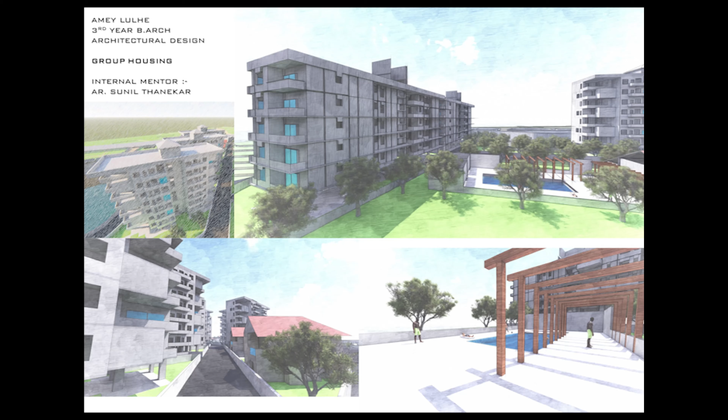Hello everyone, myself Amey Lulhe from 3rd year B.Arch presenting before you my design project of mixed community housing.

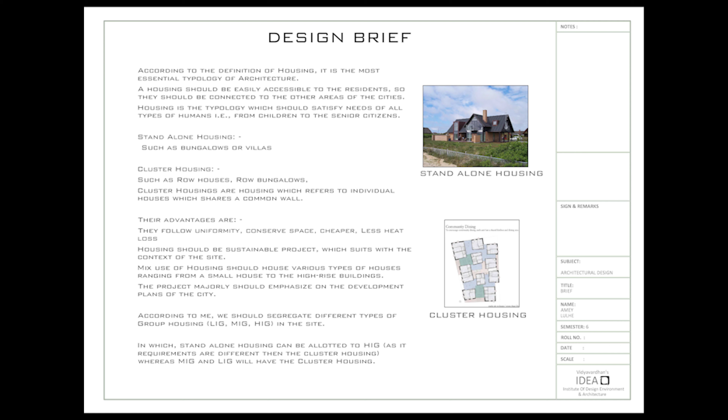According to the brief, we were required to design a housing community with certain sets of requirements. We were required to build housing consisting of mixed types which is both affordable and luxurious. I have designed the community into two parts, that is stand-alone housing and cluster housing, in which stand-alone housing is used for 4 BHK duplex and the cluster housing is used for 2, 3 BHK and 4 BHK buildings.

Case study. The case study I have done for the housing project was the Cadbury village, known as the Bournville village today. It was the decision of Cadbury founder George Cadbury to build houses for the workers of the factory. The decision was taken because the workers had to travel a long distance to the factory. The village was created for the officers and the workers of the factory, which decreased the travel time from factory to the home for the workers.

George Cadbury's thinking was towards the health of the workers. Due to this thinking, the houses were also designed. The houses adapted the Tudor house architectural style. Every house had a green space and natural ventilation, which provided more comfort for the workers who came tired from the factory. Because of the reduced travel time, factorymen got time to spend with their family.

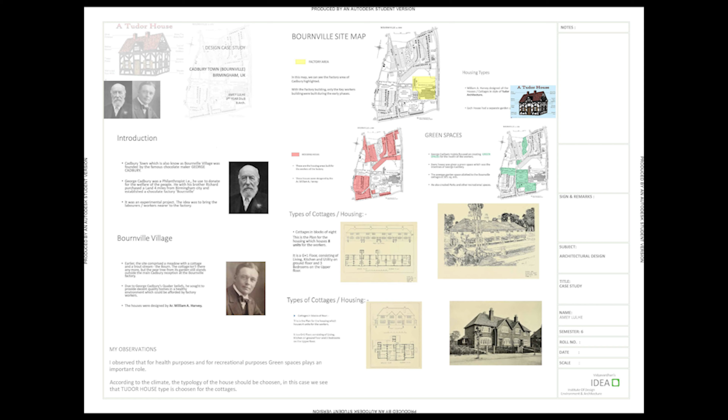Site analysis. The site is situated in Gangapur village, which is situated at the outskirts of Nashik city. The site is adjoining the major road of 30-meter width. This major road connects the city to the village. Besides this, at the west of the site, there is the famous Someshwar temple complex. At the northern side, there is the Godavari river. The site is divided naturally by the water stream into two parts, that is the upper part and the lower part.

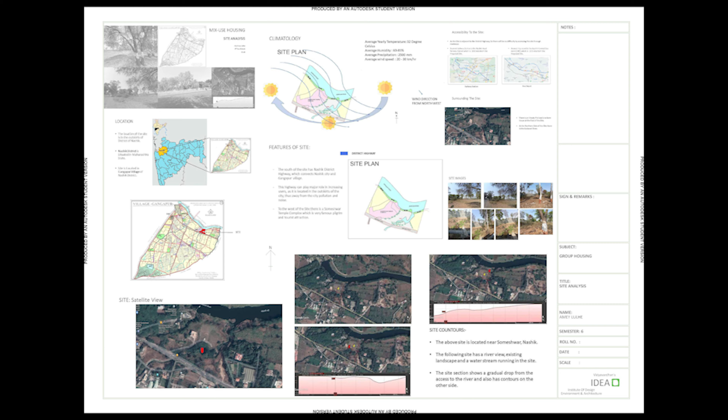The upper part is the bigger, that is the area of the part is 28,760 square meter and the lower part is of the area of 12,590 square meter. Also, at the northern side of the site, there is the reserved site for the Goda Park. As mentioned above, the site has a major road of 30-meter width at the south side of the site. It is the major accessibility point to the site. The major entrances to the site are from this major road.

I have divided the site into three parts, that is semi-public, public and private spaces. The public and semi-public spaces are the commercial complex and the sports area, and the private spaces are the residential areas and the amenity space. The commercial complex is adjacent to the major road of the village. It is accessible to the public and also the residents of the housing community.

There are four access points to the site. Starting from the leftmost, the entry is used for the emergency services. Then comes the main entry, which is situated between the commercial complexes, which have a security cabin. Then comes the pedestrian entry after the commercial complex. The rightmost point, which serves as the exit point, is also the entry point for the 4 BHK users.

There are two commercial complexes, in which the left complex contains 8 medium shops and the right contains 8 big shops. The medium shops have a size of 6 by 10 meter and big shops have a size of 18 by 6 meter. After the commercial part, there comes the residential part, which contains 8 buildings of 2, 3 BHK apartments, 3 bungalows of 4 BHK duplex and 2 buildings of 4 BHK apartments. The 2, 3 BHK buildings are arranged such that they have one major accessible road which is 8 meter wide and it divides into other internal roads of 4 meter wide.

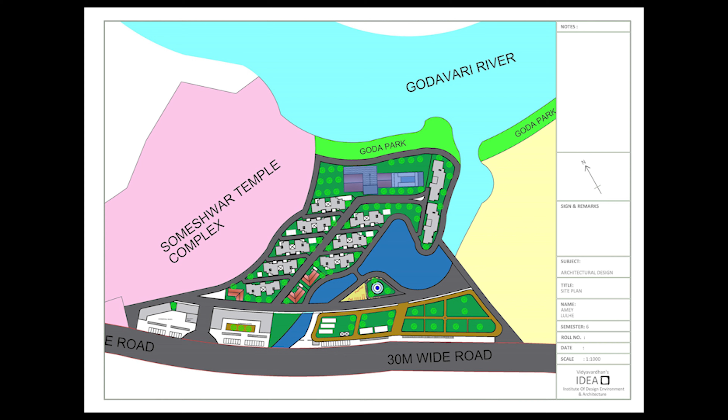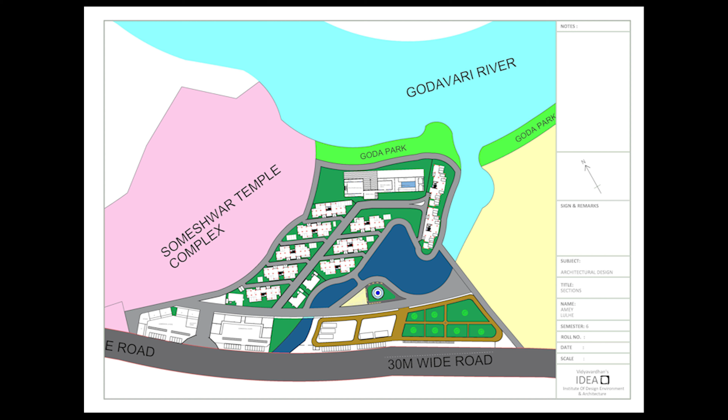Then comes the amenity space. It has the river frontage and contains a multipurpose hall, indoor game space, swimming pool and an admin area. Parking plan. This is the parking plan which shows parking of the 4 and 2 wheelers. The commercial and sports area houses parking of 40 cars and 130 two-wheelers. The residential part contains 196 two-wheelers and 100 four-wheelers.

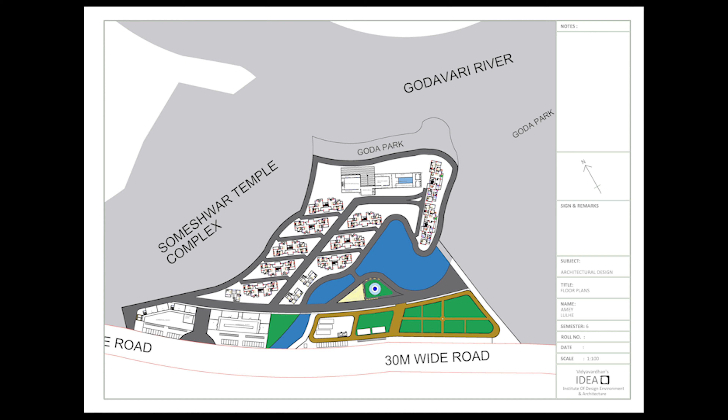There are 8 buildings of 2, 3 BHK units. Each building consists of 14 units. Thus, there are total 112 units, in which there are 56 units of 2 BHK and 3 BHK respectively. These buildings go up to 7 floors high, each floor having a height of 3.15 meter. The 2 BHK unit has a carpet area of 110 square meter and the 3 BHK unit has a carpet area of 120 square meter, each having one master bedroom minimum.

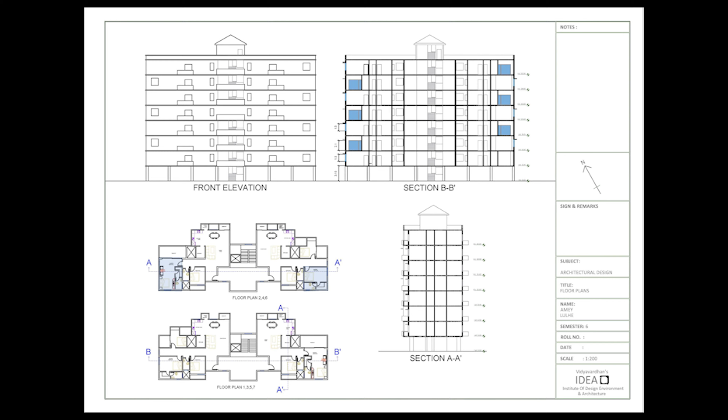Then comes the 4 BHK building, which are 2 in number having 10 units each. Thus, there are total 20 units of 4 BHK. Each floor has a height of 3.1 meter and there are total 5 floors in the building. There are 2 different units on one floor, each having a different carpet area, one having a carpet area of 160 square meter and the other having a carpet area of 180 square meter.

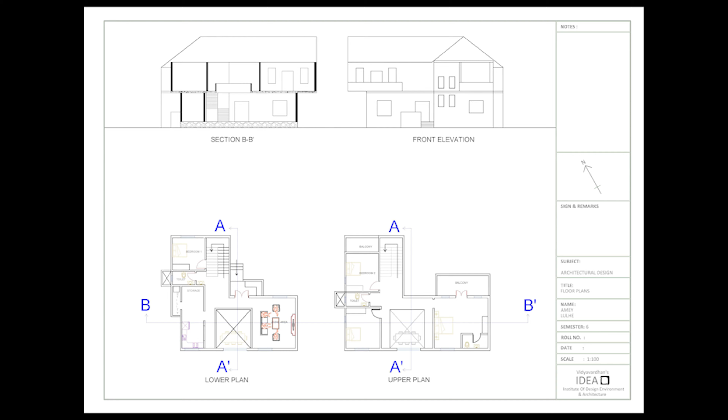Then comes the 4 BHK duplex bungalow, which are 3 in number, which are at the entrance of the residential part. The carpet area of the lower level is 92 square meter and the upper level is 85 square meter. It is a G+1 bungalow having one bedroom at the ground level and the other 3 at the first floor level. It has a double height dining space and also a sloping roof.